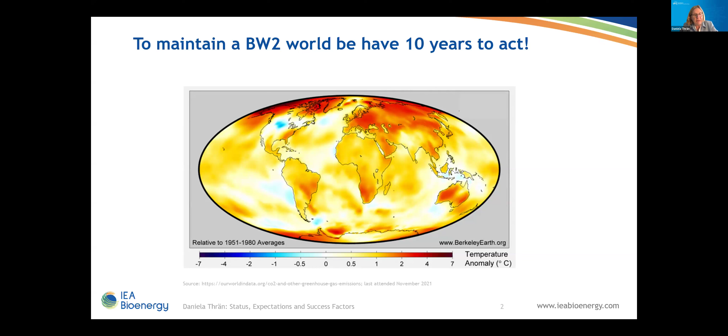However, ladies and gentlemen, I'm sitting here and sweating in Leipzig, which means climate change is ongoing. And we have at least 10 years or even less to maintain our world in a well-below-2-degrees system. The good news is energy systems are in transition in many regions of the world, and this transition also means that variable renewable resources like wind and solar are of increasing relevance.

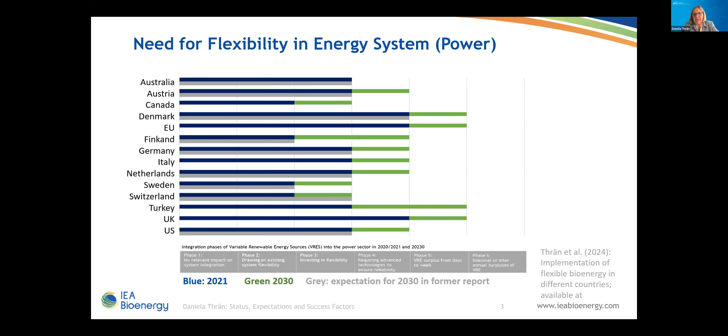The green bars mean we expect this phase for 2030 at the latest in this flexibility, and also expect to go further ahead, meaning requiring advanced technologies to ensure reliability. So flexibility needs in power markets are in a way already happening, but with regard to the flexibility potential of bioenergy, we see even more options.

This means, first of all, flexibility is needed also on the resource base, because we need sustainable resources to feed flexible bioenergy systems in the future. We have this interesting interaction between variable or fluctuating power, wind and solar on one side, and flexible power from bioenergy on the other side, which can support many energy applications.

But we also talk about storable fuels for applications difficult to electrify, for example transport or shipping, or also high temperature industry heat. We talk about the possibility to support implementation of hydrogen with flexible bioenergy.

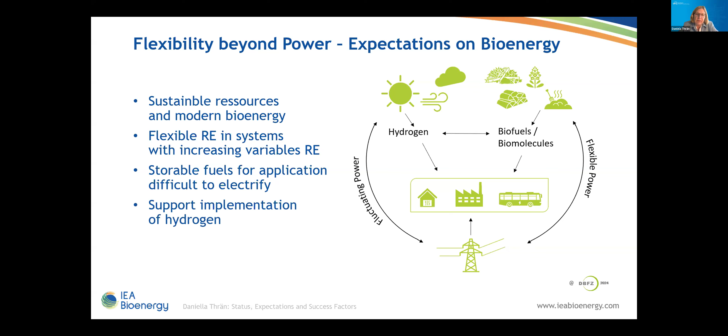Because there could be, within a certain system, different demands for electricity, which also means we could interact with hydrogen. Flexibility and bioenergy could support and facilitate carbon dioxide removal in the direction of using it for biofuels, biomolecules, or long-time storage. And finally, all these very dynamic, manifold options need smart embedding in the energy system, which mainly means networked information exchange and smart control systems.

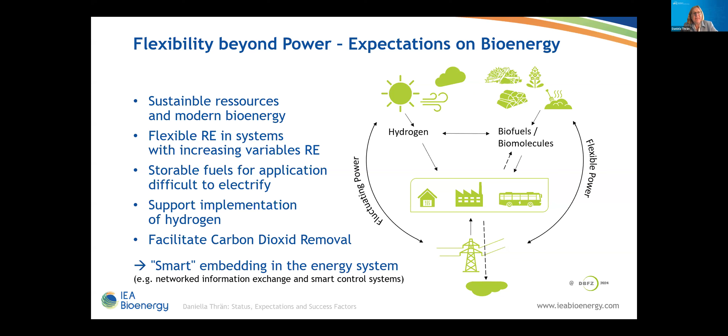So in a way, this is the larger picture. And to address this larger picture coherently, we have defined flexible bioenergy in Task 44 as the deployment of sustainable biomass to provide multiple services and benefits to the energy system under varying operating conditions and/or loads, contributing to energy security. This is a broad definition, and it very well covers those many aspects.

However, this common understanding of flexibility in general, and also flexible bioenergy, is still missing in energy expert groups. So if we talk about flexibility in other communities, for example wind power or hydro communities, they mean something different. This means that many interesting elements for this energy transition, like energy strategies, energy system modeling, energy planning etc., do not consider flexible bioenergy options appropriately, just because the language is missing.

The good news here is that IEA has started a joint action across technical program working groups to define flexibility between the expert groups. This work has started in May, and the results are expected at the beginning of next year, or let's say mid next year. This means here too we can expect to have a better understanding between actors.

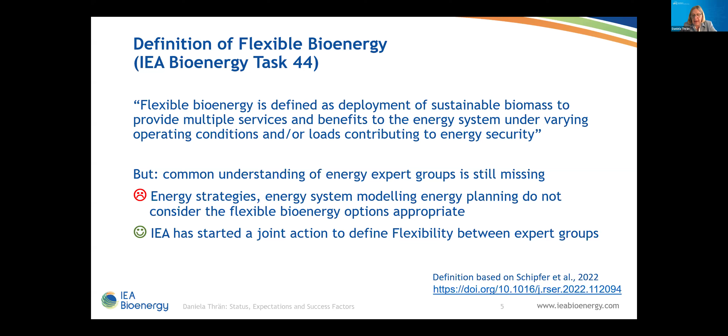As I said, we don't talk about the future only. I've provided you this broad definition of flexibility, and of course there are already many good cases in a broad variety. I will not go into these cases.

I would just like to encourage you to have a look at the Task 44 IEA Bioenergy website, where you find about, I think, 12 cases now. Those cases are real established cases, but also cases with a lot of discussion, maybe which did not come into action, though they also include lessons learned.

So options are there. It's important to share, discuss and exchange on these options. And this is why we are really happy to have also here today the practitioners who show us their approaches and experiences.

Then, of course, it's also necessary to have policy and markets appropriately designed to make access for flexible bioenergy easy. What we saw also in our questionnaires is that more and more countries establish direct and indirect support. Just to give you some examples: Denmark, Italy, Austria, Switzerland, Germany, the Netherlands, but there are more. The level of support is different, which also means the effect is different.

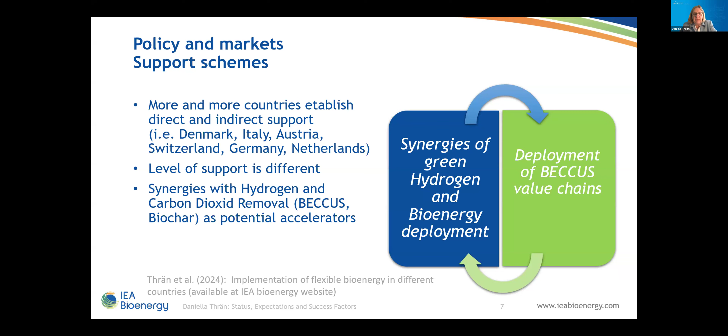The strongest positive effect on implementation of flexible bioenergy is expected from energy security requirements, and also from high energy prices. While high energy prices might bring a lot of problems in the energy transition, it might also be a development with many aspects which is more difficult. Energy security requirements are, of course, an important issue for robust and resilient future energy systems, and support here is important not only for bioenergy, but also beyond.

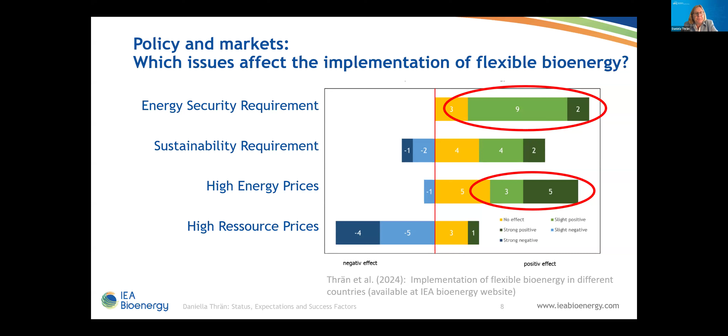We see that some positive aspects are also expected from sustainability requirements, and of course high biomass prices are really kind of a hurdle. So with this, I would like to sum up what we from Task 44 see as the way forward.

First of all, we need agreements on definitions. We are on the way with these ongoing joint activities at IEA. We need multiplication of best cases and lessons learned. This is also necessary to develop technologies and automation. I did not go into this topic here because the next speaker, Tilman Schildhauer, will talk about this explicitly.

We need policy and markets addressing energy security. And finally, all these things are important for our today's policy to improve implementation into the market. But with regard to our overall target of coming into net zero energy systems as soon as possible, all these aspects also need appropriate consideration in long-term energy system planning to develop and optimize the options for flexible bioenergy, also with a strategic view.

With this, I would like to thank you, and I'm happy to answer your questions.

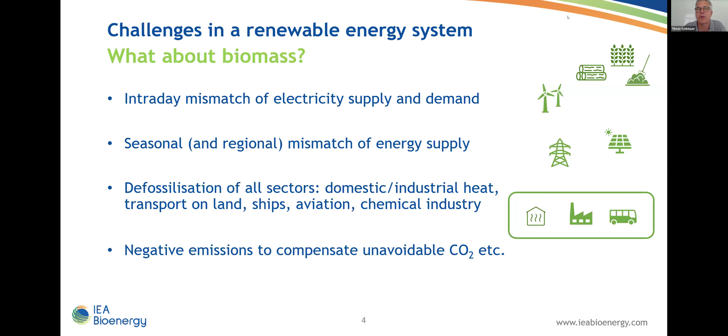So the question is now, what about biomass? What can biomass do? And the answer is biomass is our joker, our wildcard. We can actually use it for all of these options or challenges, and I will show examples for that. We can decide when we do it and where we do it. So this is one of the messages I would like to convey: there is not one-fits-all. It might depend on the boundary conditions, on the already existing infrastructure, which solution you finally choose.

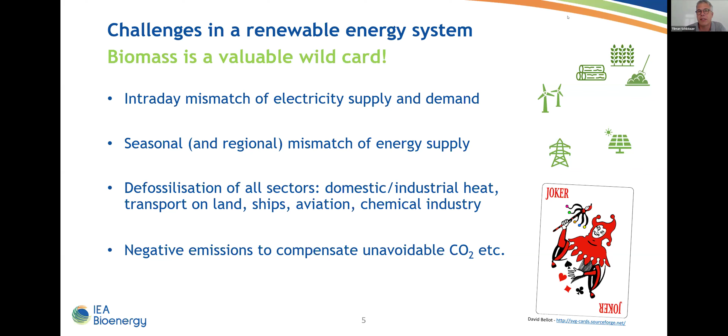So if you start with the first one, intraday mismatch of electricity supply and demand, then it's fully clear we have these biomass plants which are able to deliver electricity on demand.

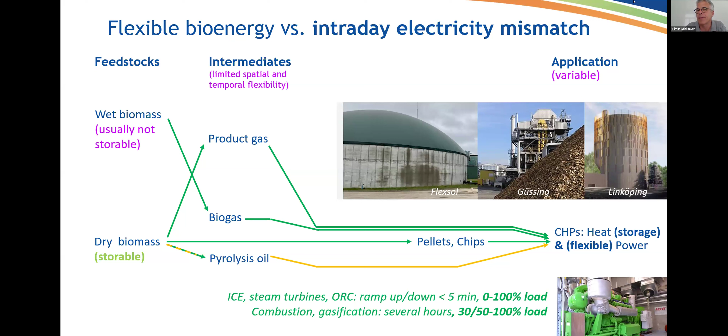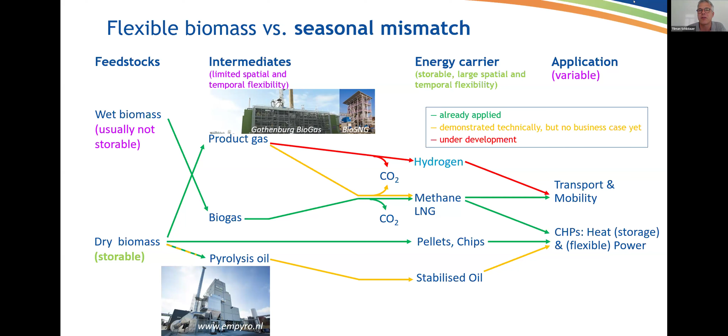If you look into that, when you produce energy carriers like hydrogen, methane, or LNG from product gas or biogas, the energy carriers don't contain oxygen but the intermediates do, so we have to take out CO2. This gives us a very cheap CO2 source because it's already part of existing processes or business cases to separate biogenic CO2. And that's a perfect moment to combine this biogenic CO2 with hydrogen in Power-to-X processes, which allows you to take the CO2, take hydrogen from renewable electricity, and produce more of your energy carrier.

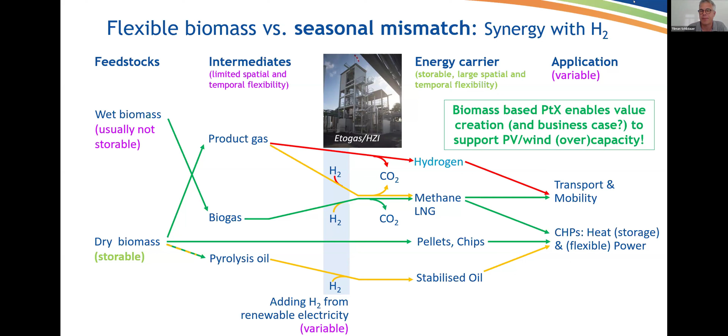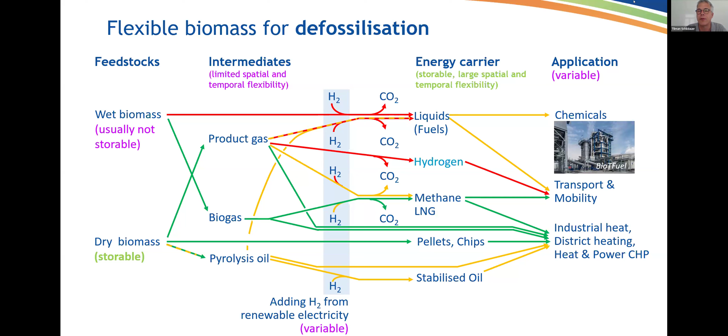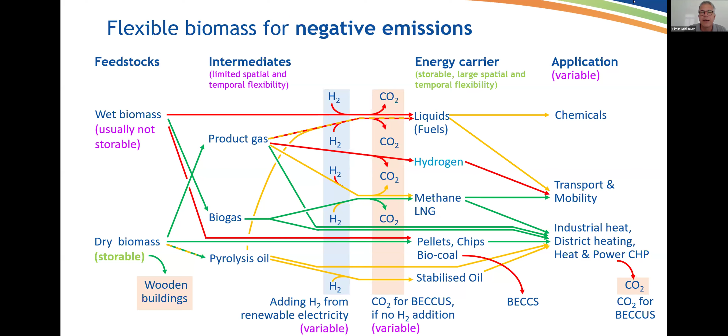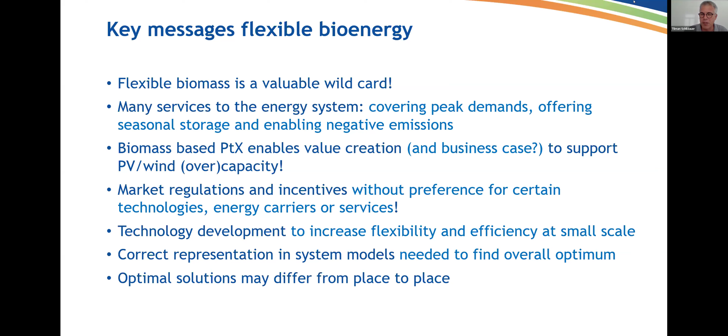So that would be my input here, and I would like to finish with the same advertisement which Daniela did. We actually in Task 44 did a lot of work on that. There's a very nice report. We are working it over, but it already exists. It's about 20 pages generally, and then for all the technologies, there's a technical appendix.

So the whole thing is close to 100 pages. And we have this very nice best practice example homepage here, with examples from Germany, Finland, Sweden, Austria, Switzerland, Australia, and so on. Here in the lower right corner, you see this nice wood-based biochar producing CHP, which actually contains a Syncraft gasifier, so it's maybe a nice starting point for the next speaker. Thank you very much for your attention.

Thank you so much. That was very interesting, Tilman. I have two questions here I would like to put forward to you, one of which you have partly already answered.

There are so many possibilities to use biomass. Is there enough biomass to do all of this? I guess the answer is, we're not proposing to do everything everywhere, but we do things that are useful in one place, and things with biomass that are useful in another place, depending on local conditions. Would you agree with that? Absolutely. I would make a lot of advertisement for that, because people always think very roughly about these technologies, but we have to really look carefully. Even in Switzerland, a small country, in one valley you might choose a different solution than in the other valley. Always think biomass is scarce.

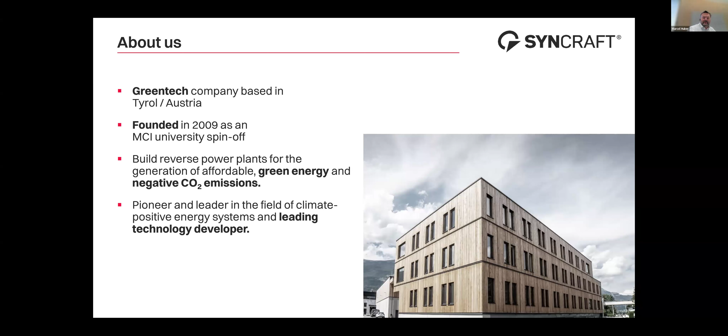What the heck is a reverse power plant? I mean, we all know what coal-fired power plants look like. They use carbon, provide electricity, and provide a lot of CO2, which might cause a bit of struggle at the moment. Actually, we're doing the whole thing in reverse mode.

And of course, there's the tree in between, so we are a wood-based system. The wood, the tree is doing all the job, but what we provide as an essential second or third product, depending how you put it, is we produce green carbon by intention. And we think this is one of the most crucial raw materials in future.

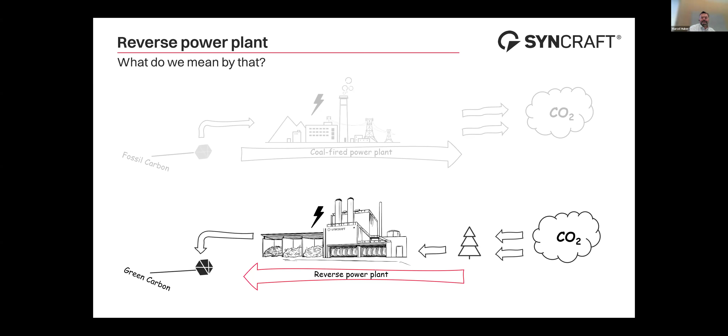When we talk about flexibility, and I think this is the most important slide I want to share and discuss with you today, it's the flexibility which you can provide with a modern bioenergy system.

What we are building our system on is wood-based residues. Whenever you build wooden houses or go for blankets or raw materials like cellulosic, you have two-thirds residues which would decay within a year or even faster, depending on boundary conditions. So these residues would be emitted to the atmosphere anyway, and the idea is to give them a good fate.

Here comes bioenergy, from my basic principles, to valorize these residues. So the key idea is no tree is chopped for bioenergy as its main purpose, that's crucial. Then we have our system in the center, and we can provide different modes of operation.

That means our plant, as it also produces green carbon, can produce more carbon or more energy, respectively gas. These are the two modes we can operate the plant in, but you can't produce ash with our system - it's always carbon in a different shape, a different configuration, and gas.

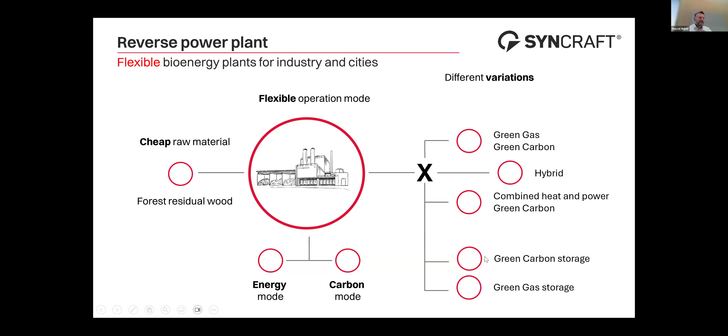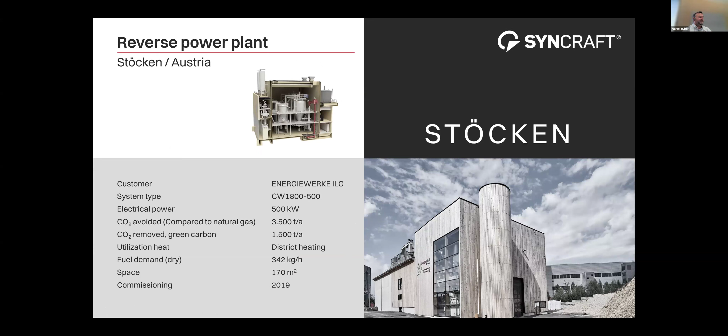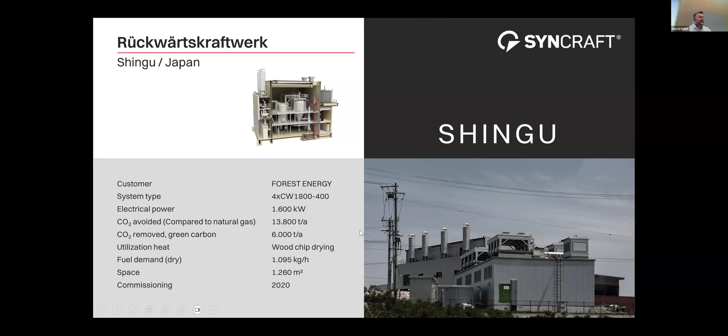Just a few plants to give all the schematics some real life. One we have seen already, the big plant in Switzerland, but we also have plants in Austria and in Japan. All of them are on a decentralized size, 1 megawatt, 2 megawatts, maybe half a megawatt. So this is also a very decentralized baseload approach we follow. And we also have seasonal plants, like the one which has become CHP of the month in Germany recently for Hansewerk Natur, a 1 megawatt plant that runs on forestal residues.

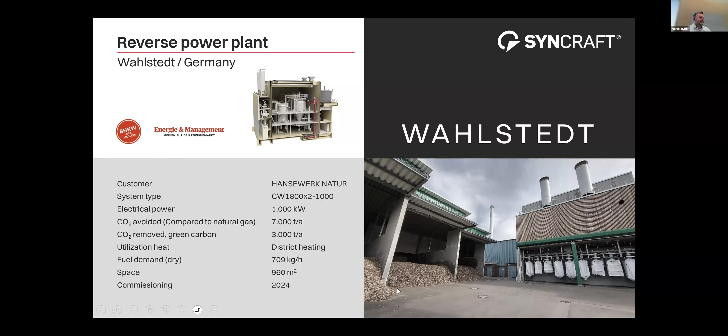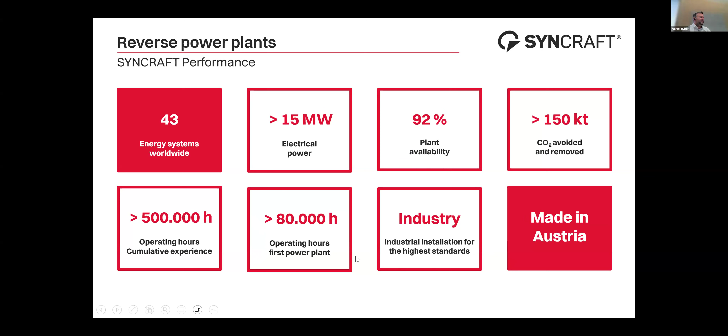An overview of what we have done so far - it's only a drop towards negative emission or defossilization, but still it's not nothing. So a few numbers: we've built 43 plants so far, and we are quite proud to be an Austrian-built power plant system.

Quite crucial is also the technology behind it. Some of you might be aware of what we are doing, but it's very unique, so I want to share the insights with you as well. I think this is crucial if you think about bioenergy and biorefining - you have to do these stepwise approaches. Otherwise you end up with intermediate products that might not fulfill product level or whatever.

So what we are doing in our system is a classical pyrolysis, but we do not do it without air - we add some air to carbonize the fuel. That is a very important homogenizing step that turns this inhomogeneous biomass into something more even, the biochar or biocoal. Then we add air in the second stage to burn all the dirt and the gases, the pyrolysis gases from the first stage, to turn them into three elements: CO2, water vapor, and carbon.

With these three elements, we combine them together into our producer gas, which is very clean, and into clean carbon-rich biochar as the second product. The gas then is sent, for example, to an engine, but can be used for many other applications, except upgrading it to introduce into the grid, at least as long as the grid is defined by methane and such high heating values.

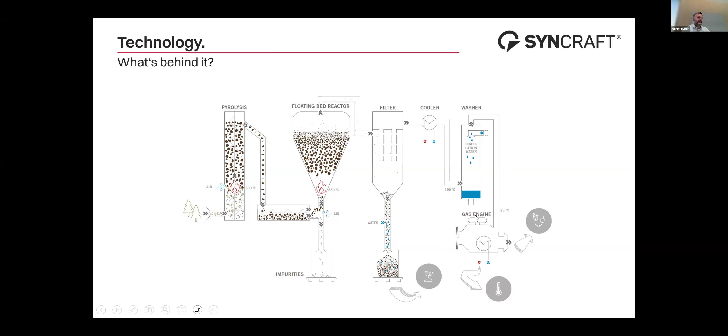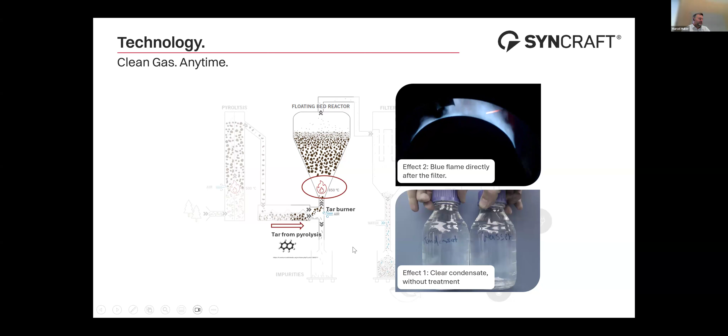So this is what the technology is about, and as said, we have this very clean gas - you might see the flame now, which is coming out directly after the filter, without any real gas treatment. That is what makes it so valuable, that you can more or less replace it wherever you need such a flame in industrial applications, or of course also in engines or turbines, whatever.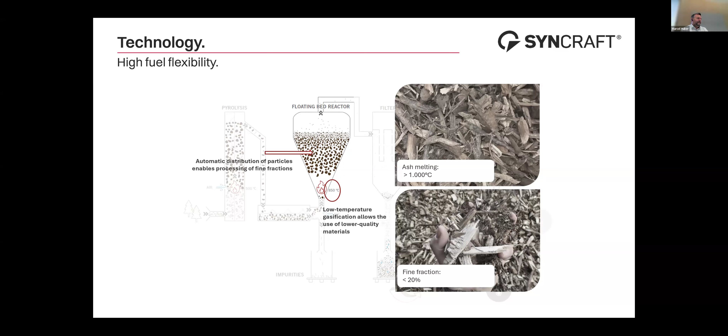When it comes to forest residues or the fuel, there's this never-ending question about whether we have enough biomass. It always comes along with valorization of biomass, especially wood, for higher applications like building houses or making bioproducts, bioplastics, whatever. But there's a big share of fuel which is not suitable for those applications, and this is about valorizing these shares in the best way.

We've already heard what we call the bioenergy ultimate love story, which is biochar and carbon capture. From our perspective, both can be combined in plants. What we're doing - I don't know whether it's the first, but maybe it's one of them - one of our plants is actually being retrofitted with a CCS unit, so it produces biochar and liquid CO2 on a single site.

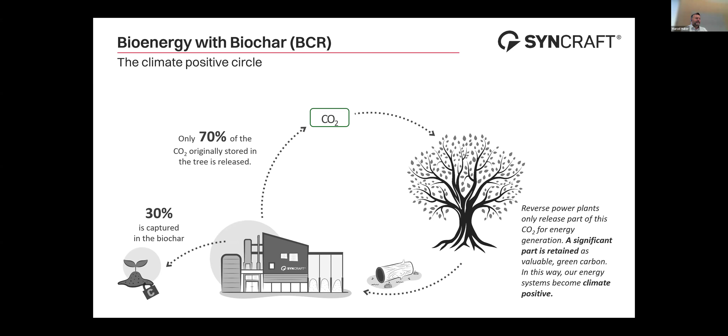It's in Austria. Looking at the overall CO2 storage capacity, a normal plant from us stores away roughly 30% of the input CO2, and 70% are re-emitted. So the 30% clearly counts as negative emission or climate positive if based on sustainable fuel, for example with RED 2 or RED 3, which our plants already apply for. If you add a CCS unit, you can go up to more than 80% on a very cost-efficient approach, which turns the plant from a bioenergy facility into a green materials supply facility. So you produce liquid CO2, in that case for the beverage industry - even if it's not CCS, it's a CCU approach.

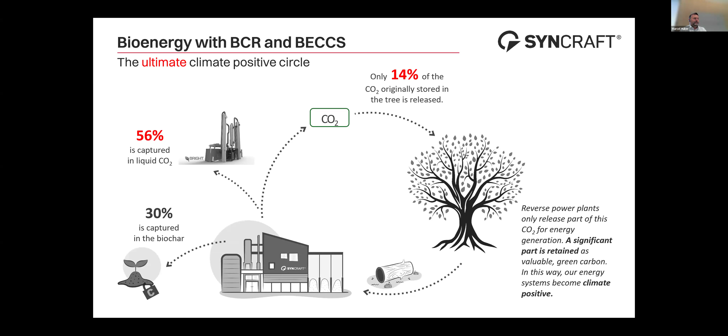But that's something you can start with on a local basis quite easily. Otherwise, if you go for big CCS plants, the big problem becomes transportation. That's also the big advantage when you look at biochar - the transportation is not the issue. This is the big advantage, and all the economics and comparison is quite equal between BECCS and BCR, but the storage system becomes a very easy job if you think about biochar compared to liquid or gaseous CO2.

What we offer, we build these plants ranging from a 5 GWh heat demand. So most of the plants are always developed from a heat perspective. It's perfectly combinable with heat pumps, boilers, whatever - it's only one part of a big puzzle in our understanding. And we can also provide baseload heat units or daily sprinters when you think about electricity markets.

So the big advantage, as said, with a normal biomass CHP plant, it might get a problem, but due to the fact that we are able to store the gas, we can build more engines with a baseload unit, and then you can really peak load for 4 hours quite quickly.

And the negative emission, I think, is the key for all future bioenergy plants. That is also the necessity that negative CO2 plants have to run 24/7, 8,000 hours a year, because otherwise they do not generate the negative emission. And the negative emission fulfilling the Paris Agreement is an 800 gigaton job at the least. So it's not a small task.

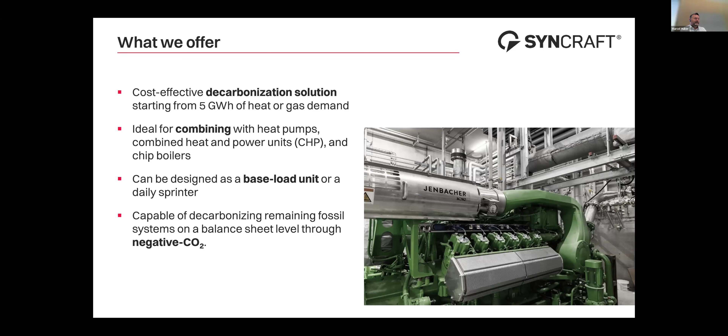That's it, and I think the job is big enough. So the whole energy systems, the whole renewable energy system, have to do all their best to cope with the challenge we're all facing. Thanks for your attention, and looking forward to the questions.

Thank you so much, Marcel. Amazing what you have been achieving in these 15 years, because really producing electricity from producer gas is not an easy task, and has been very often tried and very seldomly really successfully achieved on a continuous basis. So I think that is really a great achievement, what you have done.

Can you give us a short overview in which countries are currently most interested in what you're doing? Very good question.

Actually, on a technical base, the key thing is that you have this heat demand on an annual basis, I would call it. So whenever there is a district heating tradition, understanding, or policy framework, I think this is a perfect place for such units. But of course, also the electricity prices or the energy prices for gas have to match. So it's not only a single basis you can answer this question from.

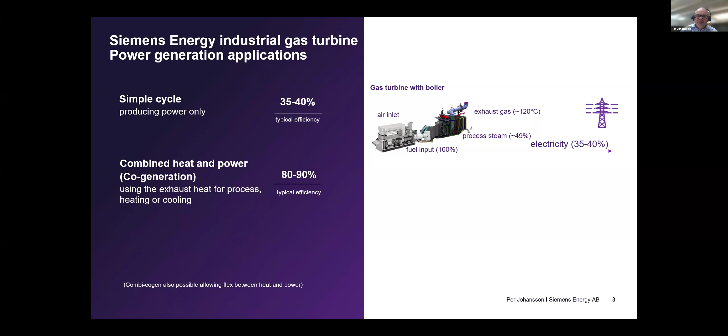In many cases, you add a waste heat recovery unit behind the gas turbine to make use of the rest of the energy coming with exhaust gases. With this setup, which we normally refer to as CHP, combined heat and power, you can reach efficiency levels even above 90%. And if you want to maximize your electricity production with such a system, you can produce steam from the exhaust gases, and use that steam to drive a steam turbine instead and produce more electricity. Then you typically can get up to efficiencies of slightly above 60% for really big installations.

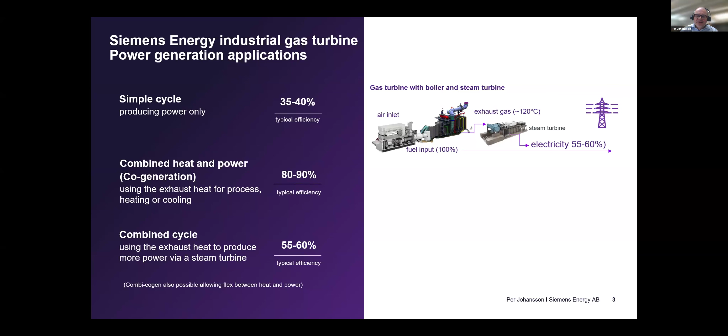So this slide is very busy, but I hope I can take you through it. What we want to highlight here is that gas turbines are actually the Swiss Army knife when it comes to providing ancillary services for the more and more volatile grids over the globe. Gas turbines in operation are covering the whole spectra of required ancillary services, from providing inertia, from providing reactive power for voltage control, to primary response, secondary response, and even long-term power reserves needed for tertiary response.

So what is important to take from this slide is that if the gas turbine shall provide the whole spectra of energy ancillary services that is asked for, the gas turbine is most flexible when it is in operation. A gas turbine, depending on size and model, needs from 2 minutes to, let's say, 15 minutes to start if it is in cold standby.

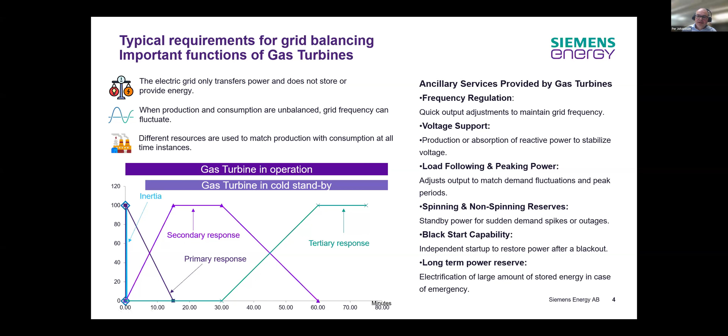And when it is in cold standby, it doesn't provide the first levels of ancillary services. So therefore, it's important to look for possibilities to keep the gas turbine in operation at a low operational cost, which is what I cover in the next slide.

And this has already been discussed a little bit earlier by Tillman, for example, that if you have a heat off-taker making it viable to have the gas turbine running even if electricity is not demanded, then you can set up a combined heat and power system. And as I said in the first slide, you get up to 90 and even above 90% overall fuel efficiency.

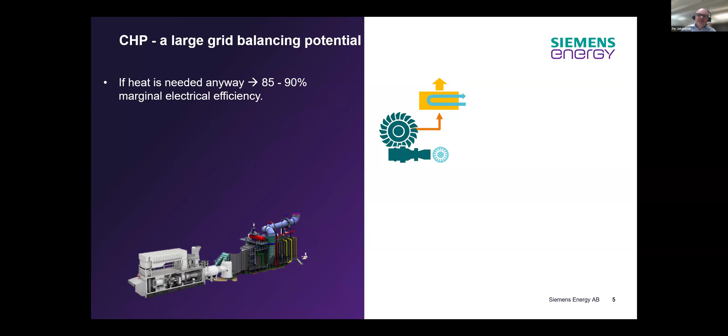The problem here, as we discussed, is that heat production is connected to power generation. So if you only need heat and not power, then it's not a very flexible solution. But if you decouple the heat production from the power generation with a thermal storage, which for low temperature thermal storages is a very low cost investment, I would say, then you can have a much more efficient and much more flexible power generation and grid support function of your gas turbine installation.

So the increased capacity per heat demand makes smaller heat demands still economic for combined heat and power, because then you can operate your plant in this way.

You can continuously provide your heat demand with a varying demand on electricity, and meet the power demand only when there is real demand for the gas turbine or the plant—if it also includes a steam turbine—to produce electricity, when you decouple the power generation from the heat generation and store the energy, the heat, in the storage.

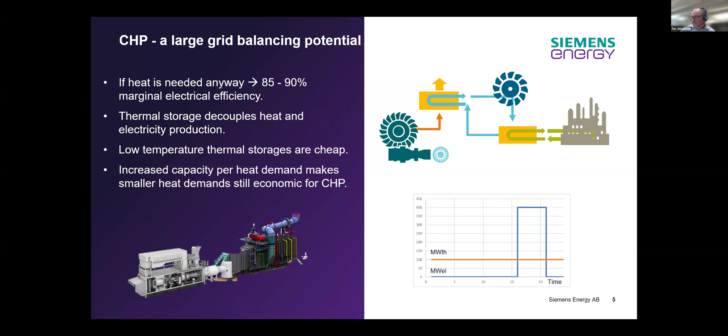Currently, we focus a lot on the gas phase capability, and of course hydrogen is always in focus, and also ammonia. Currently we run our gas turbines with the dry low emission combustion system, meaning very low NOx emissions. We run them on 50% cracked ammonia and up to 75% hydrogen. We are looking at being capable of running on 100% in the very near term for 3 out of our 4 models.

Whereas on the gas phase, I should mention biogas normally has a very much varying composition—some of them are more or less identical with natural gas, and some are a little bit weaker due to more content of CO2. But I would say that typically all kinds of biogas are possible to use in our gas turbines without any problem, and we have references quite some years back on different kinds of biogases and what we call weaker gases.

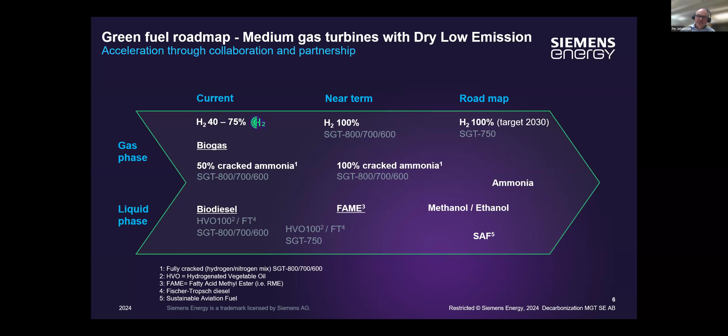For some real references, since 2020 our test facility here in Finspång has operated on blends of biogas. We are actually importing to the site as much biogas as we can to use in our testing facilities. Every gas turbine is tested before it's shipped out from the factory. As you can see, we can operate on biogas compositions with the Wobbe index down to 22, 25. Maybe not everyone is familiar with the Wobbe index, but this corresponds typically to a heating value of 20 megajoules per kilo, for example. So we can go quite far down with our standard combustion system.

We can also modify to go even further. Maybe not as low as Marcel's pyrolysis gas yet, but it's definitely not impossible to redevelop the combustion system to be capable of running on those weak gases as well.

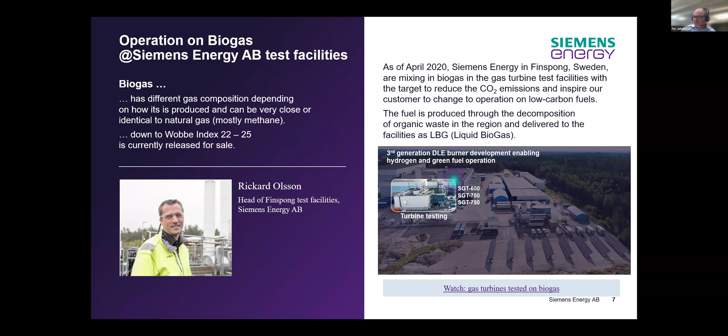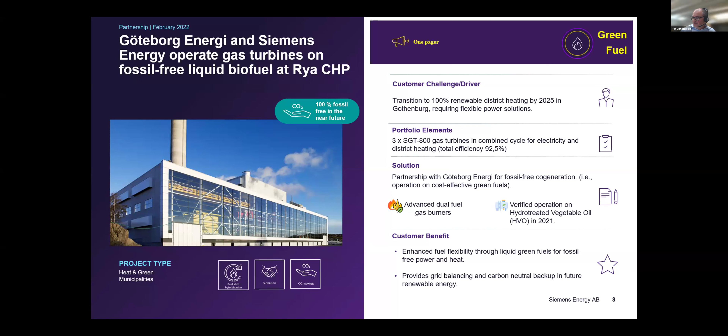One example we have on biodiesel is that we have 3 units in Gothenburg that have been in operation on natural gas for 10 to 15 years. They provide power and district heating to the local district heating network. In 2021, we verified this plant to be running on HVO 100 liquid diesel, while still maintaining the capability to run on natural or gaseous fuel. So this is a dual fuel machine supporting the district heating network, the local grid, and is now quite much used for grid ancillary services, due to the high efficiency of this setup.

Another reference is Stockholm Exergi, where in 2023 we commissioned a backup gas turbine, 60 megawatts, for the Stockholm local grid, and it runs on 100% HVO 100 as well. So the capability for both gaseous fuels and liquid fuels from biogenic sources is already there, and has been there for quite some time.

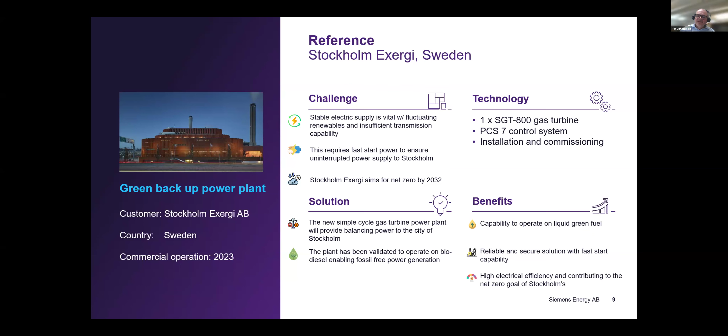So the conclusion from this presentation, and what I want you to bring with you, is that gas turbines are actually the ideal technology for supporting stability of electrical grids. This flexibility combined with the already developed and proven fuel flexibility is the ideal combination.

However, for frequency regulation, spinning reserve, voltage control, and load following, as I was discussing, it requires the gas turbine to be in operation and connected to the grid, and then cost of fuel becomes critical for the economic viability of providing these services to the electrical grid. But decoupled heat and power generation provides a very good opportunity to set up such a system and achieve economic viability.

I should also say that if it's not viable to run the gas turbine continuously to provide these first levels of support, it can very well be combined with a conventional battery system. That's analysis we've done in other projects, combining conventional battery systems with gas turbines, where the gas turbine is in cold standby but running on biofuels.

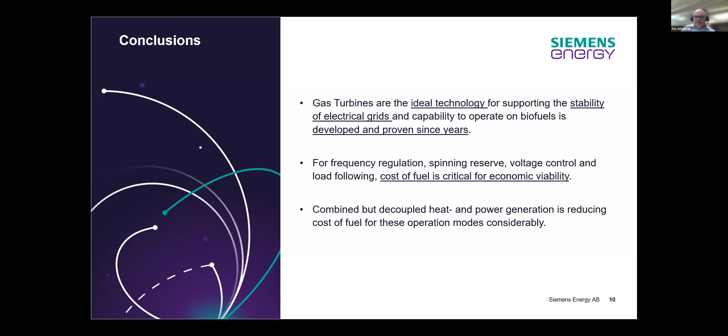So that concludes my presentation. If you want more details than I had time to give you here, you can download this report from us, which you will have in the documentation sent out later. And with that, I'm ready for your questions.

Thank you very much. Many thanks, Per. That was quite amazing what gas turbines can do, also using biogenic fuels.

There was one question from the audience, whether you have already run gas turbines on syngas or pyrolysis gas. Yes, we have — within Siemens Energy we have a gas turbine model program ranging from 5 megawatts up to plus 400 megawatts. A few of the smaller units have actually had their combustion systems modified in some cases to run on syngas. It's very rare, but we have some examples, yes.

Right, well, thank you very much. I do not see any further questions right now in the chat, so I think we're coming to the end of this webinar.